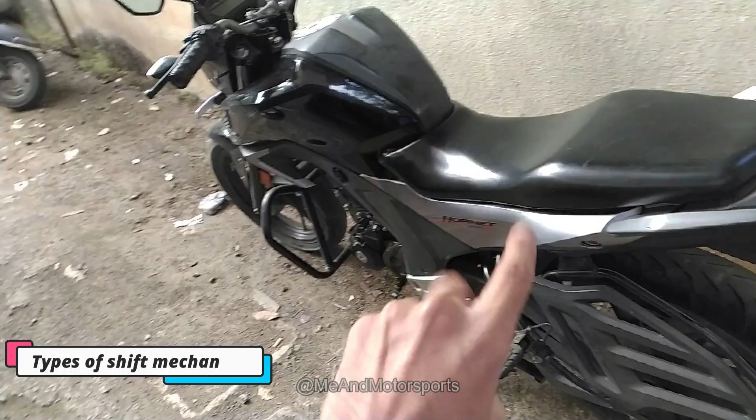Although the concept is pretty much similar in car and bike, the mechanism is a bit different. There are basically two types of shifting mechanism. One is both sides - for your better understanding, this is how it looks like.

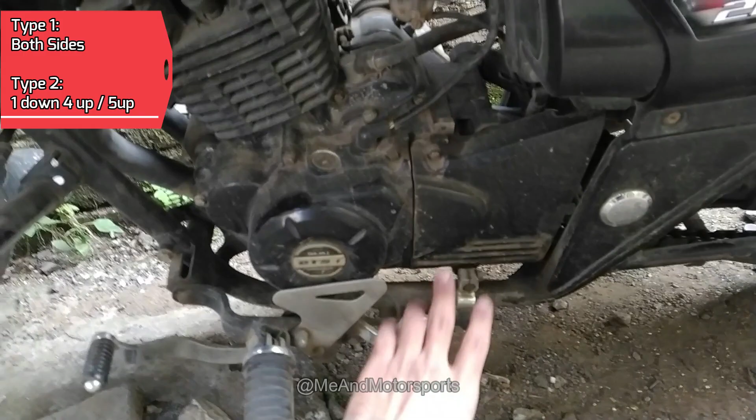In this, as far as I remember, if you shift behind, you go like 1, 2, 3, 4, and if you want to reverse it, 4, 3, 2, 1.

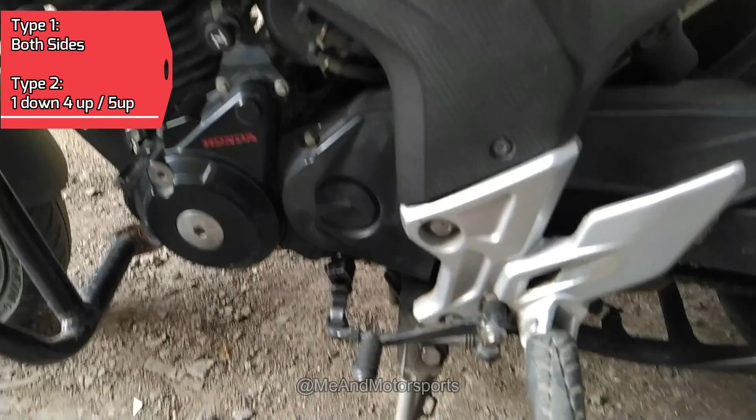This is how this one works, and the other one is 1-down-4-up, for which we will refer to my bike. This is how the 1-down-4-up mechanism looks like. So in this, for the first gear you have to shift down, and the rest is 2, 3, 4.

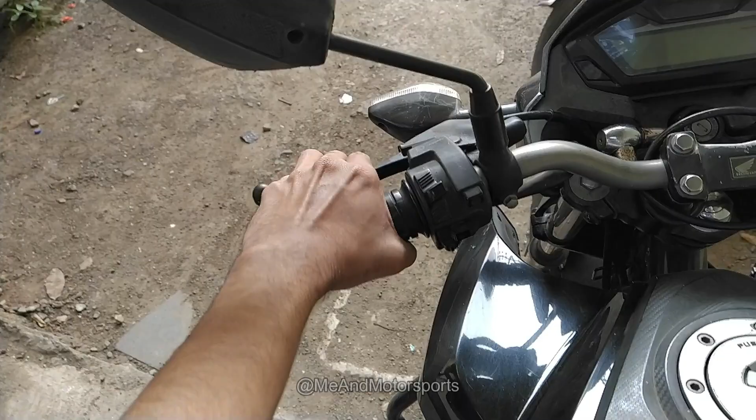On every shift you need to engage and disengage the clutch for smooth shifting, and when you disengage the clutch you might feel there is a loss of power.

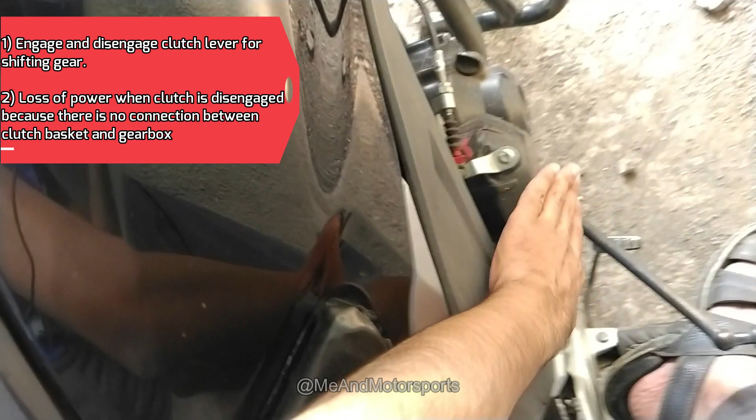That's because there is no pressure on the clutch plates right over here, and hence there is no connection between the clutch basket and the inner hub, that is the gearbox. You'll understand this a bit better further in this video.

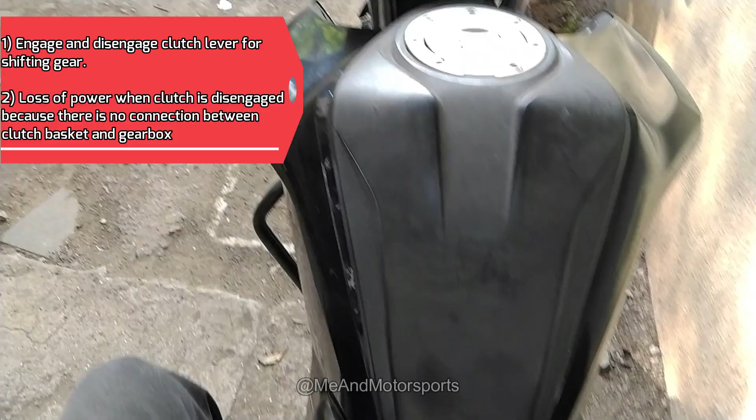Once the clutch is released, the plates are then pressured and there is connection between the gearbox and the clutch basket. This will sound a bit complicated if you are not a mechanical engineer, because it really is complicated, for me at least. So I'll try to make a detailed video on this too - how and when, I'll tell you after explaining about gears.

Now when we shift a gear with the help of the gear lever, the gear lever is connected to a shifter shaft, and the shifter shaft is connected to a ratchet mechanism.

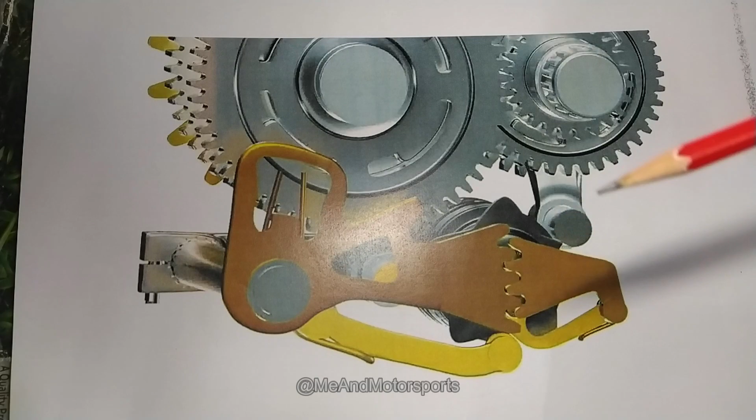This ratchet mechanism is connected to a shifting drum which has shifting forks, and the gear dogs and all the gears are fitted into these two forks. Let's not get into that right now, it will be a bouncer.

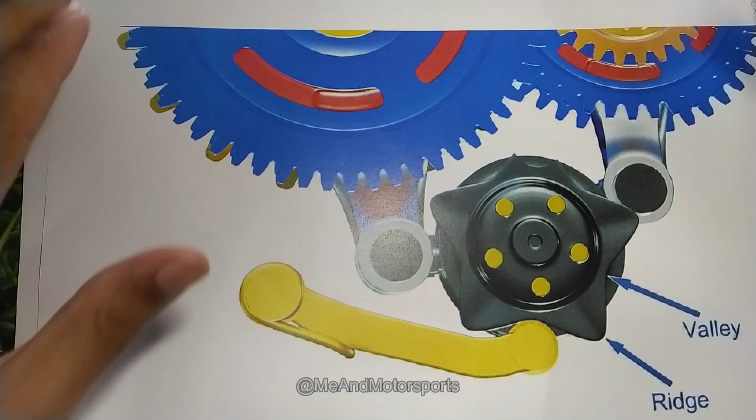Now the gears are connected to this input and output shaft as shown in this diagram. There are two types of gears here: the ones in red color are the splined gears, and the ones in blue color are called freewheeling gears.

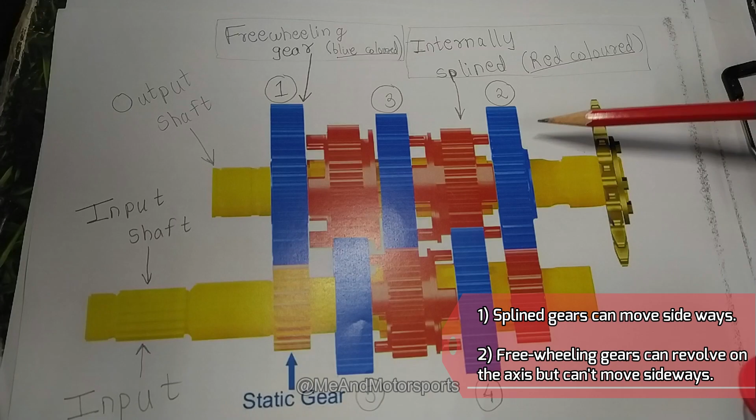The splined gears are meshed with the input and output shaft and can move sideways along the shaft. The freewheeling gears can spin freely about their axis but can't move sideways. The remaining one right here is the static gear.

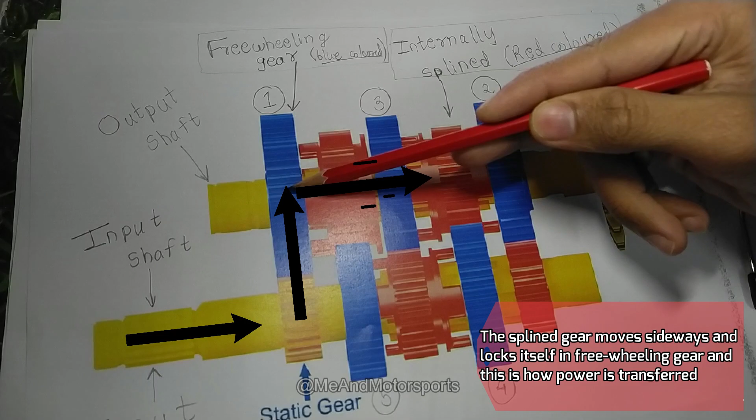If we shift to the first gear, then the splined gear having dog teeth will slide into the freewheeling gear which has recesses, and hence the power is transferred from the input shaft to the output shaft. The output shaft is connected to the sprocket, and through the sprocket, with the help of a chain or belt, the power is transferred to the rear wheel sprocket and the rear wheel is rotated.

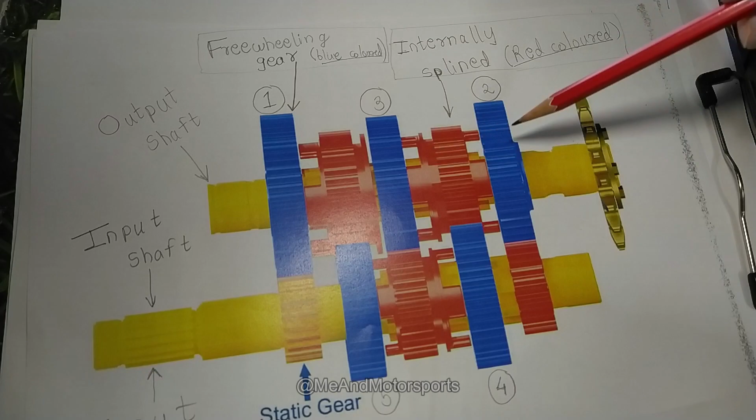The process is the same till the fifth gear. Now when we shift to second gear, this splined gear will come back to neutral again, and this splined gear will lock itself with the freewheeling gear, and this is how the power is transferred.

For the third gear, it will go like this. This spline gear will get engaged with this, and then power will transfer from here. For fourth, it will go like this, and for fifth, it will go like this.

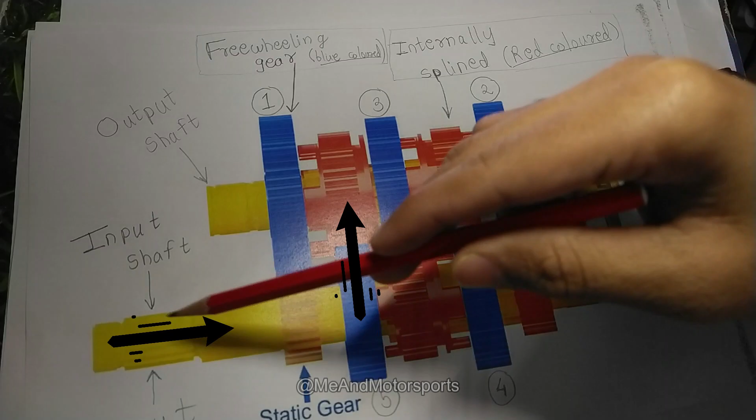You must have experienced that when we shift to first gear, we get really high pickup power, but the speed is less. That's because the purpose of the first gear is to get the bike running from a stationary position, and it requires more power because the bike needs to get moving from 0 km/h, and for that we need high torque. That's why the gear used for this process is the largest compared to the other four gears, and the gear size keeps decreasing as we move to higher gears.

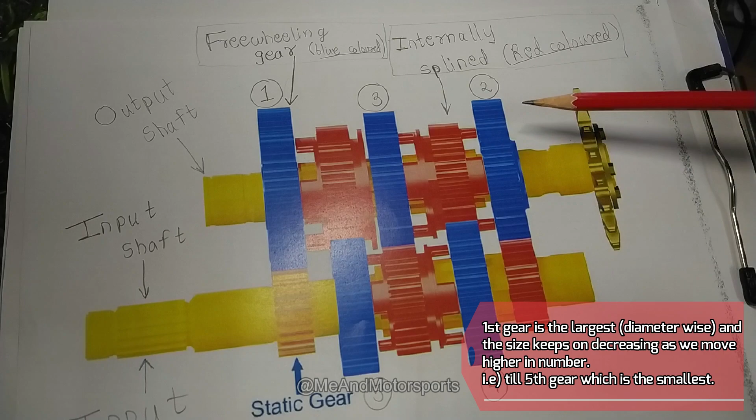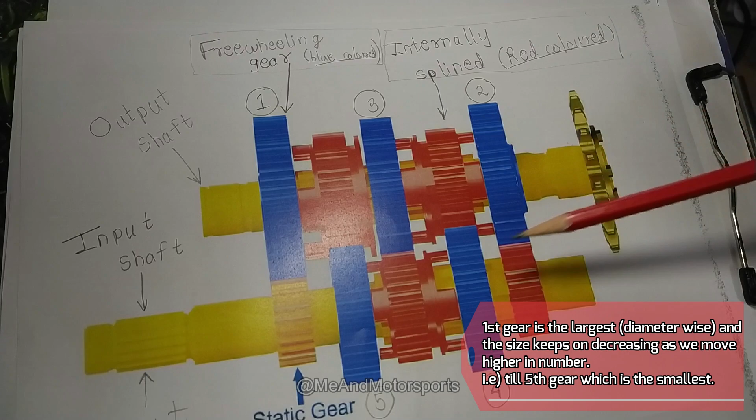Second gear is a bit smaller than first gear, which gives us comparatively less torque but higher speed, and this keeps changing the same way till the fifth gear, where the torque is the lowest but the speed is the highest.

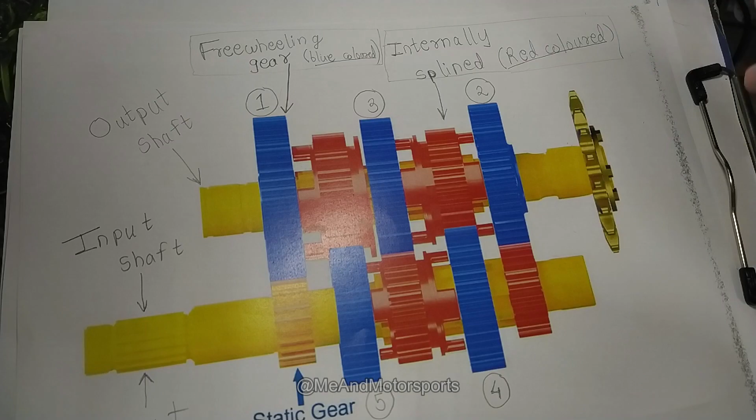I wish I had access to a real gearbox or clutch basket or any other stuff, because it will be really easy to explain with that, and it will be way easier for you to understand. I'll work on that and find a garage or shop that will provide me access to their stuff, and then I'll come up with a more informative video just for you guys.

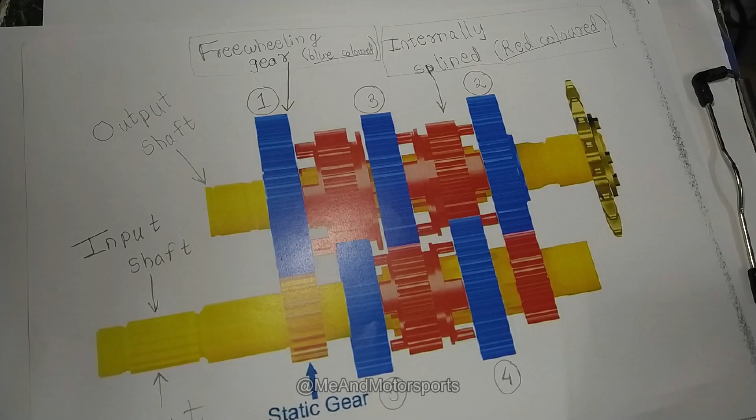So moving on to the next part, which is neutral and false neutral. When we want to keep the engine running but we don't want the vehicle to move, we shift to neutral. Have you guys ever wondered what actually happens inside which keeps the engine running but the vehicle is in a stationary position?

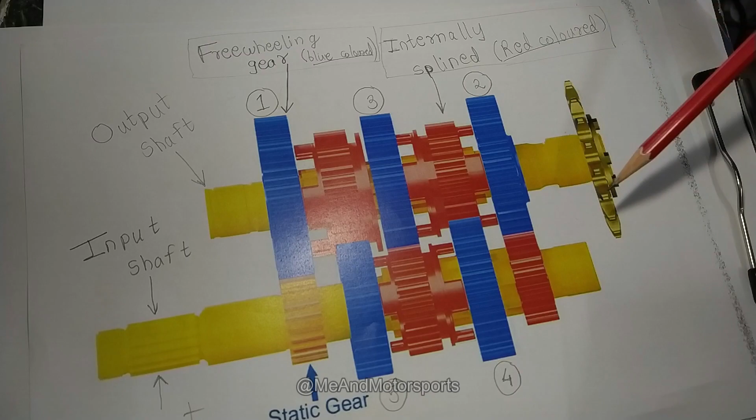Regarding false neutral, we use a star shift detent mechanism for shifting gear, which looks like this. In this, we have ridges and valleys. A spring-biased roller rolls on these ridges and valleys. Every valley is a gear, and on every shift, the roller moves from one valley to another valley. While doing this, it passes through every ridge.

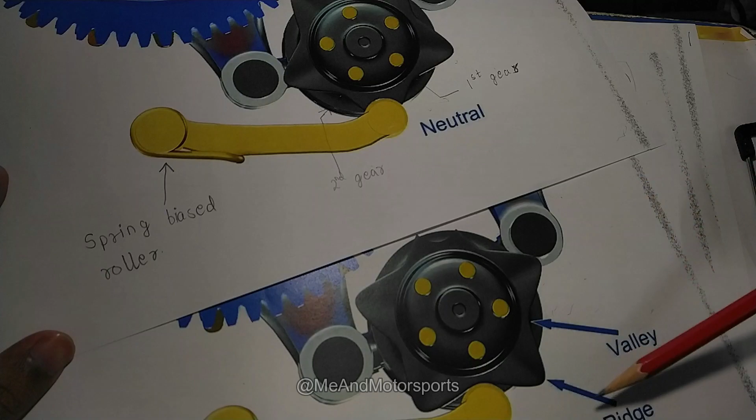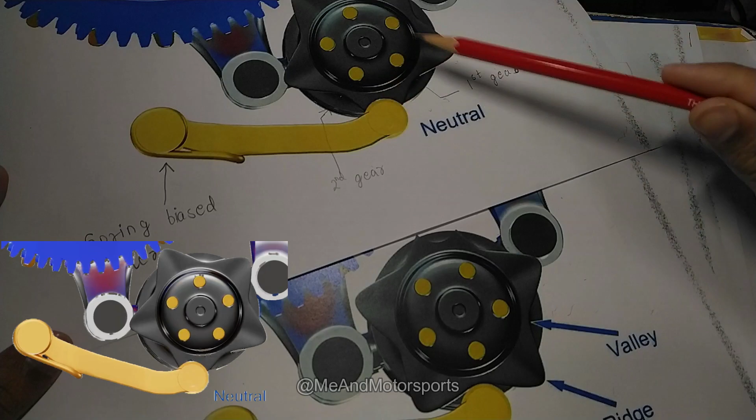Every ridge is nothing but neutral, but it can't stay on that ridge in the neutral position, so it immediately moves onto the valley. Now the ridge between first and second gear is rounded off, as you can see over here, and that's why the neutral is between first and second gear. As you shift from first to second gear, the roller sometimes gets stuck in the neutral, and this situation is called false neutral.

I hope you guys understood what is the purpose of the gearbox, and I reckon you roughly understood how it works. I'll try to make a proper detailed video as soon as I get a chance, and if there's anything else you want to know about, please mention it in the comment section. I'll try to make a video on that and answer all of your doubts.